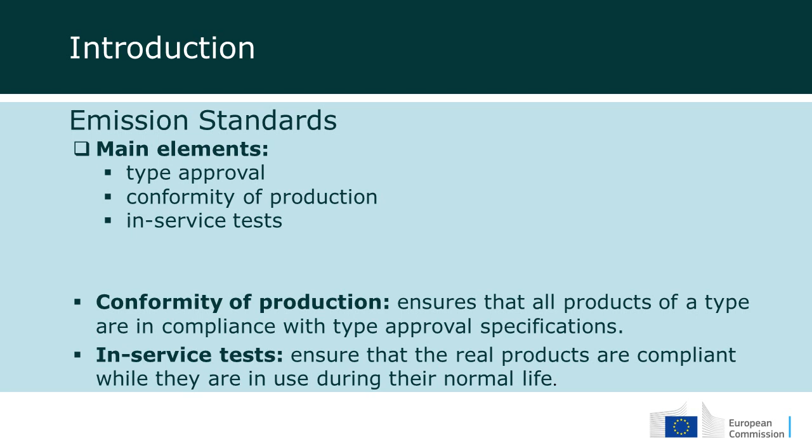So what I'm going to address today in a deeper way is the in-service test.

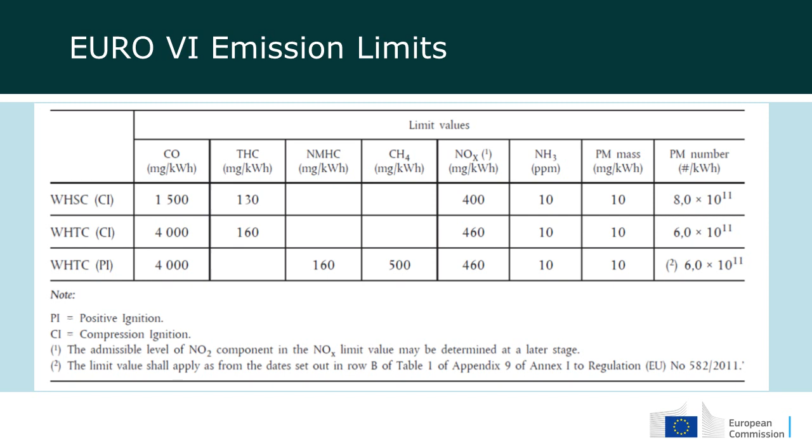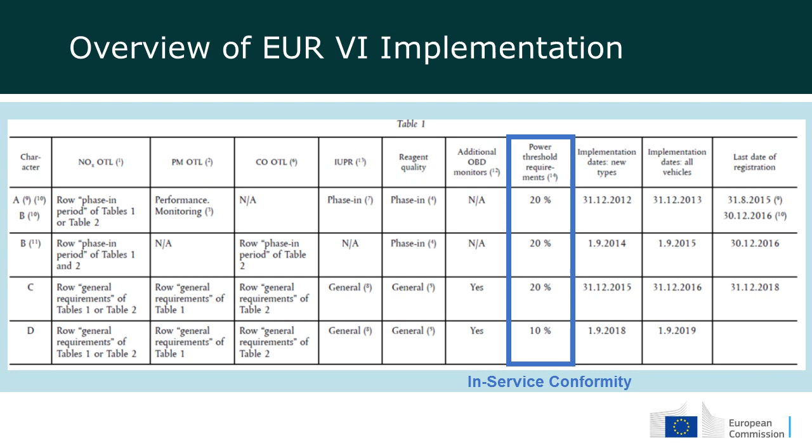Just to remind you of the limit values, which I think you are all aware of. Something that Euro 6 included is the introduction of the particle number, shown on the right of the slide. As I said, it's not a static regulation, it has had several amendments, going from the so-called Euro 6A to Euro 6B, C and D, with the last D already published last September, if I remember correctly. What I have put in blue are the areas that concern in-service conformity, and in particular the so-called power thresholds, which I will address shortly.

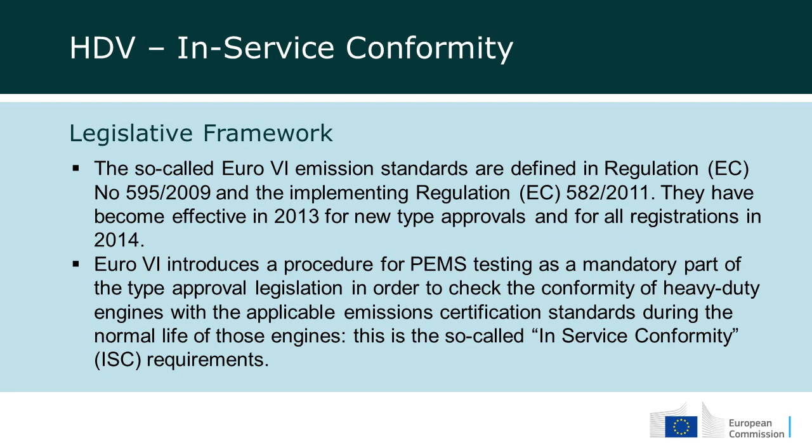So the Euro 6 is based on regulation 595/2009. However, the real bulk of the regulation is in the so-called implementing regulation of 2011. And as I said, maybe the cornerstone is the introduction of portable emission measurement system testing, the PEMS testing, as a mandatory part of the type approval legislation and during the life of the vehicle, the so-called in-service conformity.

One option we had to check that the vehicle during its life is still fulfilling the requirement would have been to take the engine off the vehicle and test it on a test bench. Of course, that brings downtime to the operator and is a very cumbersome thing to do. So we opted for measuring the performance of the vehicle on board, and that's where PEMS comes in, allowing us to check with a certain amount of reliability if the vehicle is still conforming with the expected emission levels.

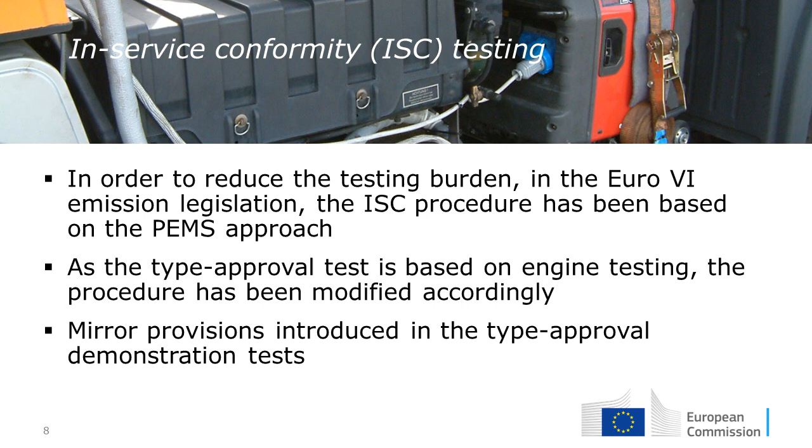We are measuring the vehicle on the road, and we need to know what the emissions of those vehicles are in terms of grams per kilowatt hour. So we have some mirror provisions to be able to do that.

The in-service conformity testing, as I said, has been repeated several times and is, in our opinion, a cornerstone of the success of Euro 6. It's not only performed during the life of the vehicle, it's also performed at type approval, the so-called type approval PEMS test.

The purpose is verification of the performance of the engine and emission control system over the useful life. I've noted the useful life of different vehicle categories in Europe, which may not map one-to-one to vehicle classifications in India. Essentially, M vehicles are buses and coaches, N2 vehicles are heavy-duty trucks under 12 tons, and N3 vehicles are heavy-duty trucks over 12 tons.

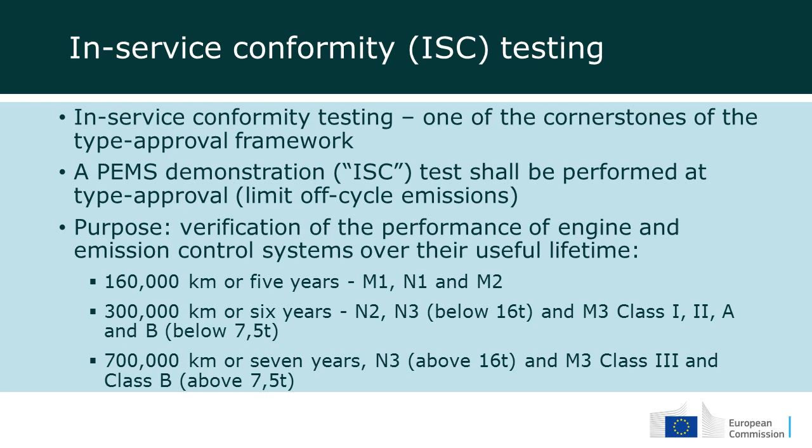So, as I said, the in-service conformity is done on the vehicle operated on real driving routes with normal loads and with the professional driver that vehicle will always have.

The first in-service conformity test, let's call it the type approval test, is done at 18 months from the first registration of the vehicle, with at least 25,000 kilometers. And then every 2 years that test has to be performed.

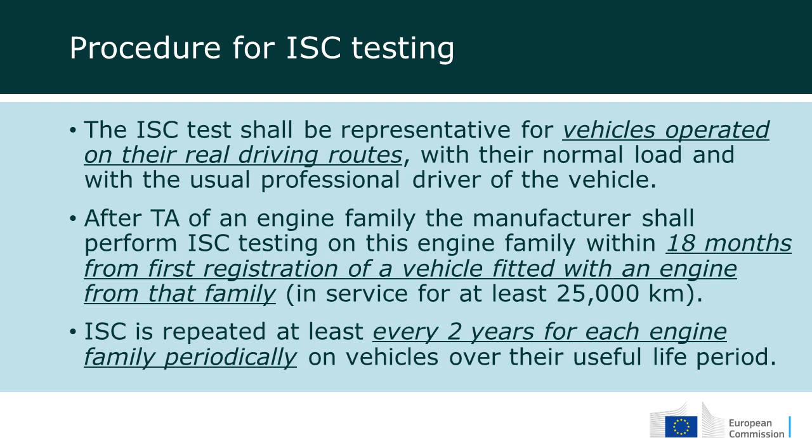Just a note here, not all vehicles are tested this way. What's tested are representative vehicles of the family of engines we're interested in. So it's not that every producer has to test all the vehicles they've produced in the last 2 years—only some representative engines and representative vehicles of that engine family.

As I said, for this type the payload is normally between 50 and 60% of the maximum. There are conditions to be tested, including maximum altitude and temperature, equivalent to the Euro 6 type approval, from -7 up to 35-36 degrees. That may need to be reviewed for India, because the temperature profile there is quite different to Europe. Although we have extreme temperatures, ranging from +40 in South Spain to -20 in northern Sweden.

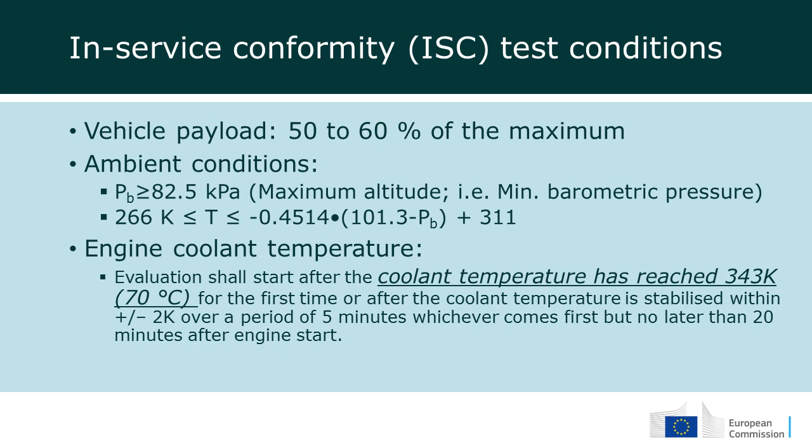At the moment, what we're doing is that the data is only processed as part of the in-service conformity for hot operations. We understand hot operations as those where the coolant temperature of the engine is above 70 degrees C. We'll see this later when I go through the assessment we did of the PEMS procedure and how that impacts really knowing if the vehicle is operating properly or not.

Of course, the trip composition is not just any trip. What I mean is the trip is a normal trip, but it has to have certain compositions. For different types of vehicles we have different percentages of urban, rural, and highway or motorway operation, defined depending on the velocity the vehicle is doing. For urban, it's up to 50 km/h. For rural, it's between 50 and 75. For motorway, it's above 75 km/h.

We'll see that these characteristics have been changed for the last version of Euro 6, the Euro 6D, and why that's being done.

As well, the length of the test is equivalent to or longer than 5 times the work performed during the WHTC, our World Harmonized Test Cycle, or the CO2 emitted during that test. This is done in order to have enough statistics of the vehicle's performance to come up with a reliable assessment.

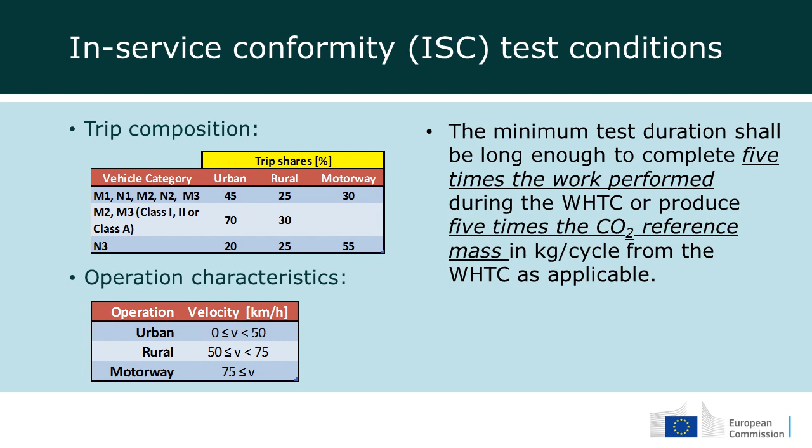Now, going to what we do with the data once testing is performed. Again, not all the data can be used. The data is used only if it's within certain parameters—both ambient conditions, equivalent to those during the type approval test, and the temperature of the engine, in other words the coolant temperature above 70 degrees C. Then what we process is not the full length of the data.

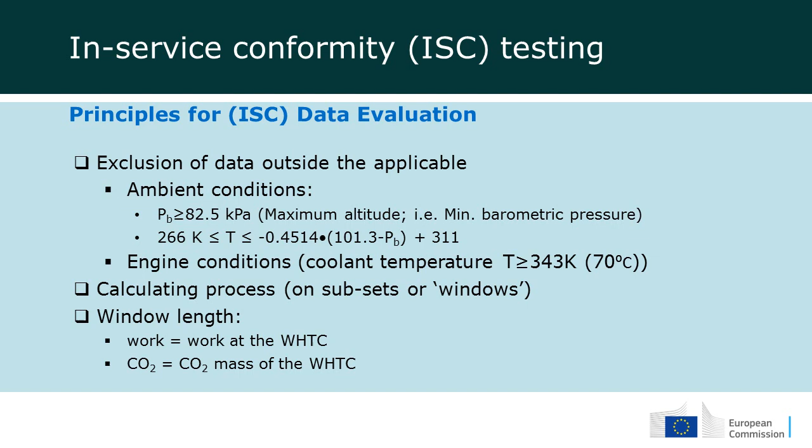We are doing a subset of that data, and I'll comment on that in a few seconds. The length of those windows, which we call the moving average window, is equivalent to the work done or the CO2 emitted during the test at the WHTC.

With those data, on the left you see the approach based on work. On the right, the approach is based on the CO2 emitted.

We can define the so-called conformity factor for each window, which is the integral of the emissions of the pollutant of interest over the limits. That conformity factor is the one we compare with the limits imposed for those windows.

Equivalently, on the CO2 side, it's slightly more difficult because the CO2 will not have the work available directly, so the approach is made per unit of CO2 emitted. But at the end, we have the same equivalent values in one case or the other, as we'll see later.

At the moment, before Euro 6D enters operation, only windows with an average power above 20% of the maximum engine power are considered, and you need 50% of those windows to be valid. Equivalently for CO2, this is transformed into the maximum length of time that window can last, which is just a conversion of power and work into time.

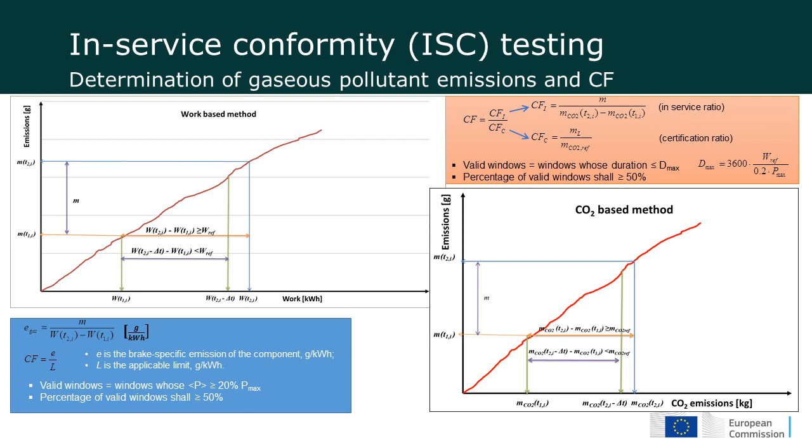So those windows are defined as follows: you start at time 0, and move forward adding the corresponding work until you fulfill one times the work at WHTC. Then you perform the integration of that window and calculate the conformity factor for that window, and so on.

Then you move the window again, at the frequency of data acquisition, which is normally 1 Hertz. So every second we move the start of the window ahead until we fill up the CO2 or work performed, and again perform the emission and conformity factor calculation.

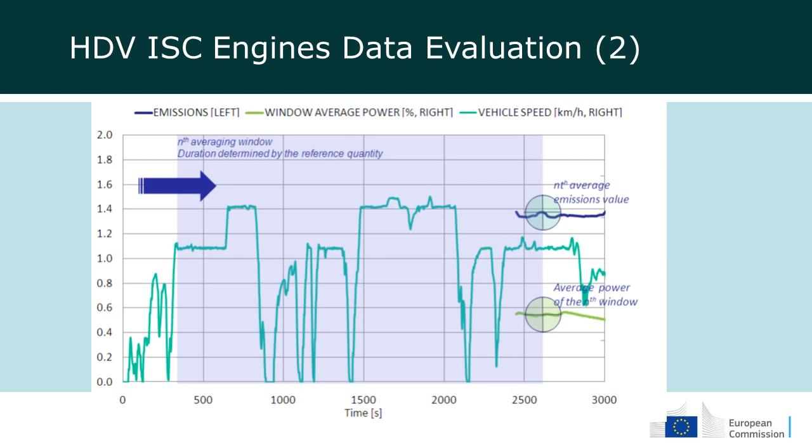At the end, what you do is assign to that test the 90th percentile of all the data you have. So we take out the top 10% of the maximum emitters among those windows, because those can be values that, for whatever reason, went above normal standard operation during the test.

With that approach, we are quite confident that the engine, once extracted and given a type approval test at the test bench, will have passed the test.

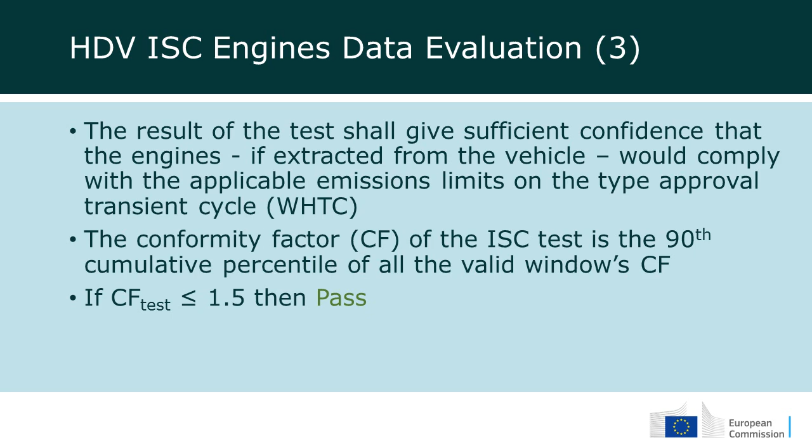The value that 90th percentile has to be less than is 1.5. So the maximum allowable value for those windows is 1.5 times the regulated emission limit.

So how has all this come together to give us confidence that we are fulfilling our roadmap? I'll refer to a few points from the open literature. We find that emission levels compared with Euro 5, the Euro 6 levels are 80 to 90% better in NOx, published in 2015 in an equivalent meeting.

Or that heavy duty has led to a significant improvement in real world emissions or performance of Euro 6, again in 2016, last year, in another meeting.

As I indicated, Euro 5 was not fulfilling our roadmap, but Euro 6 has performed much better than Euro 5 in terms of how much extra emission we can have in real operation. We have between 1 and 1.5 for Euro 6, however for Euro 5 it was 1.9, nearly 4 times, and that's even worse than Euro 4, which was 1.3 to 2.2.

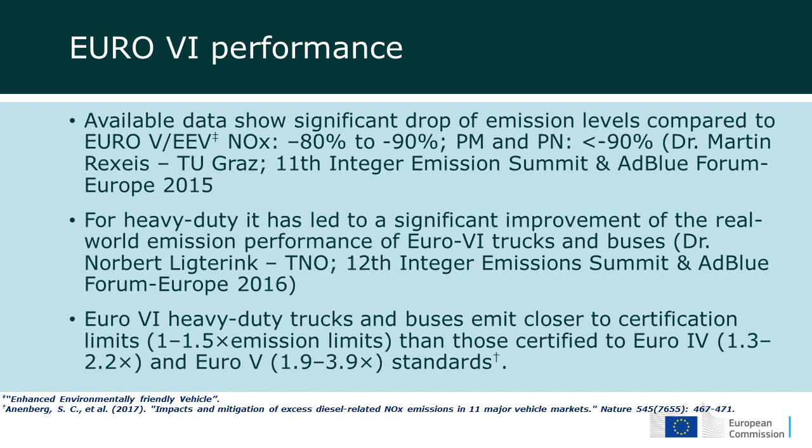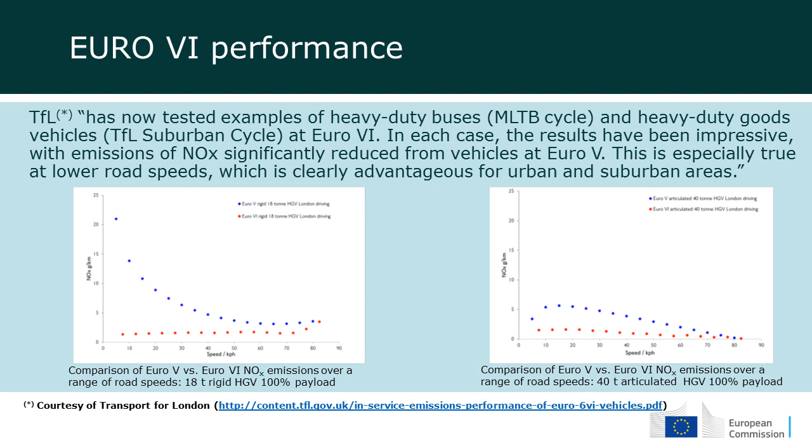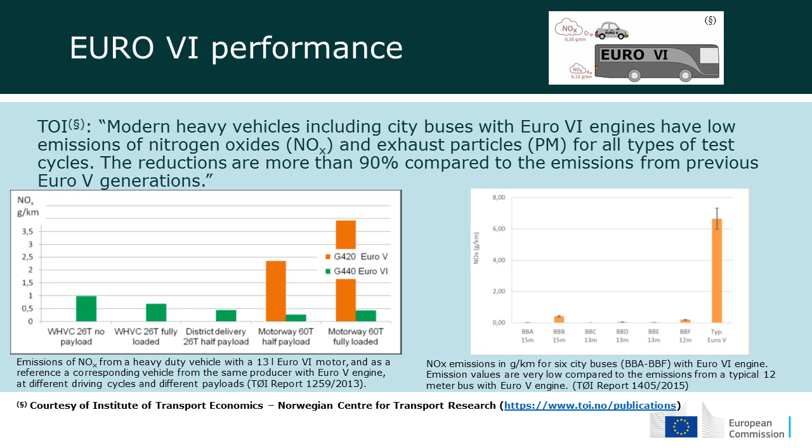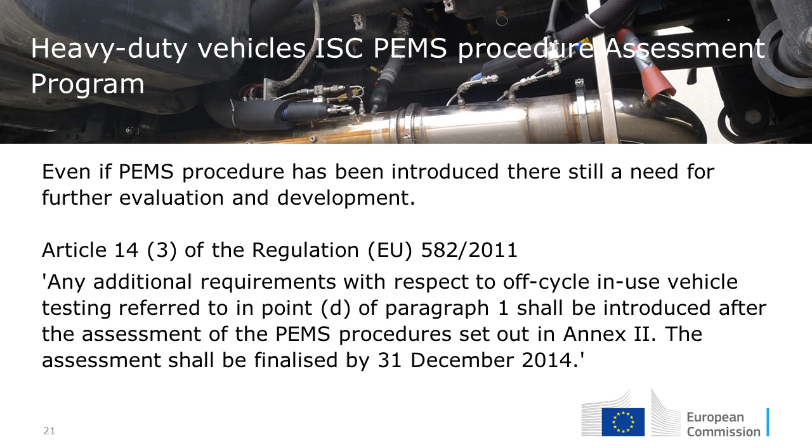We have seen that in-service conformity has done the job well, but the regulator at the time this was put together still had some puzzles to see if it would work, and introduced into the regulation the need to assess the performance of the procedure proposed. That assessment was done by the JRC, trying to address the impacts that cold conditions might have on vehicle performance, the impact of different trip parameters, different payloads, and the influence of trip composition.

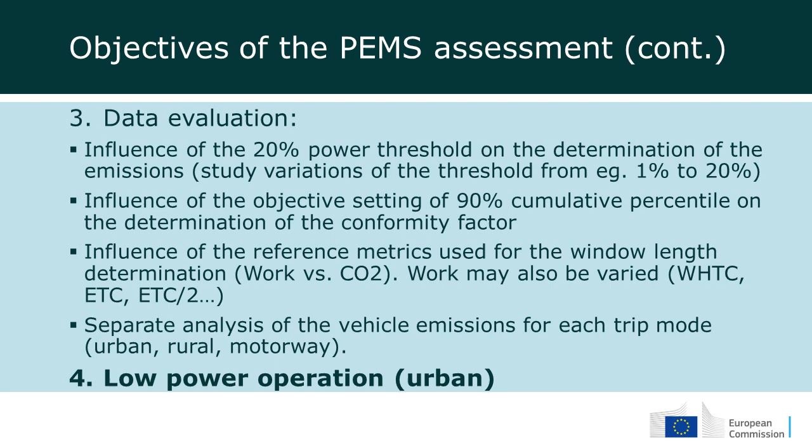As well, is that evaluation the right one to address and assess the performance of the vehicle? One particular point very important to the regulator was low power operation. That's understandable, because low power operation happens in the city, where the impact on the population is larger. So we performed that assessment.

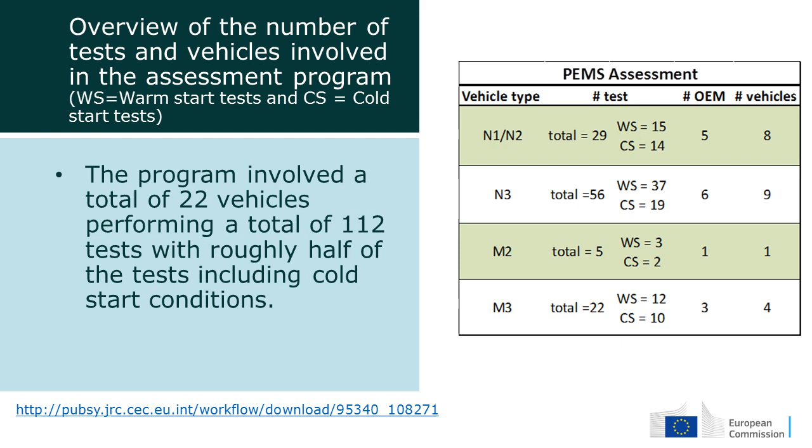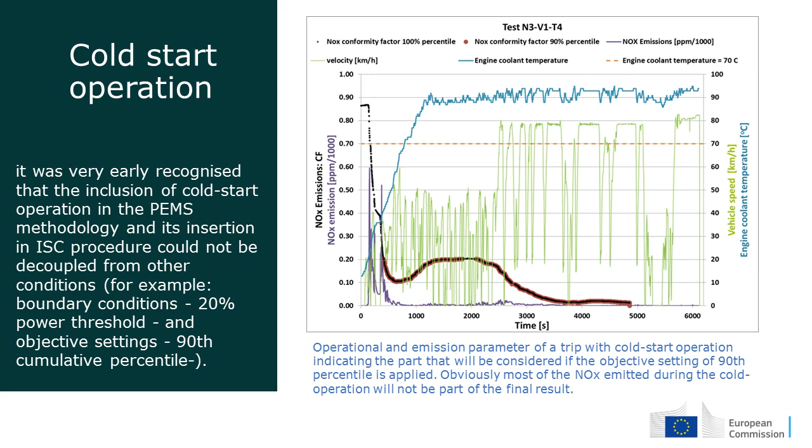Very early in the assessment, we saw that cold conditions—meaning operation of the vehicle with coolant temperature below 70 degrees C—are very important. In this graph, you see that most emissions in a Euro 6 vehicle occur during that part of the trip where we are still in the warming up period.

The other thing we saw very easily is that we have, as I said, a power threshold to define the valid window. That power threshold was set at the onset of Euro 6 at 20% of maximum power, but we saw very early that this eliminates most of the low power operation of vehicles, meaning most of the impact those vehicles have in urban conditions.

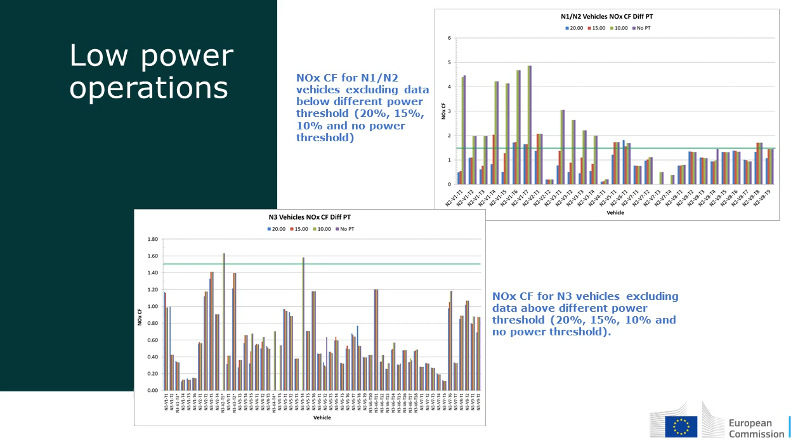Here you see it better. This is an N2 truck performing its trip, and by introducing the 20% threshold, most of the urban operation is not considered when assessing the performance of the vehicle.

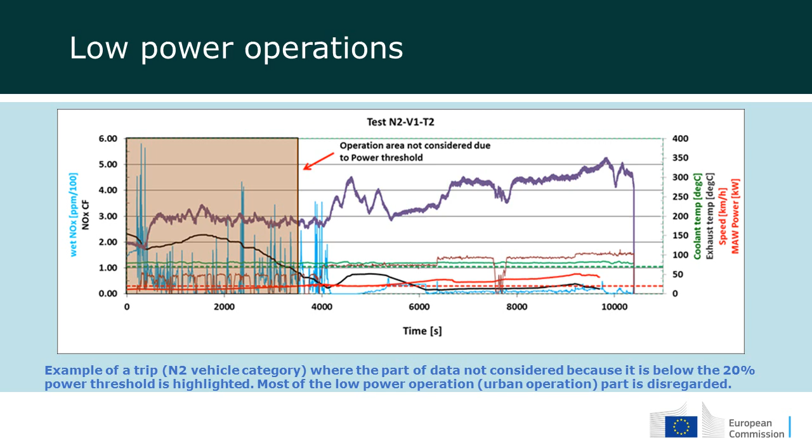As well, the distribution of urban, rural, and highway driving was in some ways very different from what's expected on the WHVC, with a tendency to operate vehicles always at the top end of the velocity bracket. So if urban was defined as 0 to 50 km/h, most vehicles, although supposed to be in urban operation, were operating near 50 km/h, for one simple reason: they wanted the SCR temperature to be at the right level so it's operating properly.

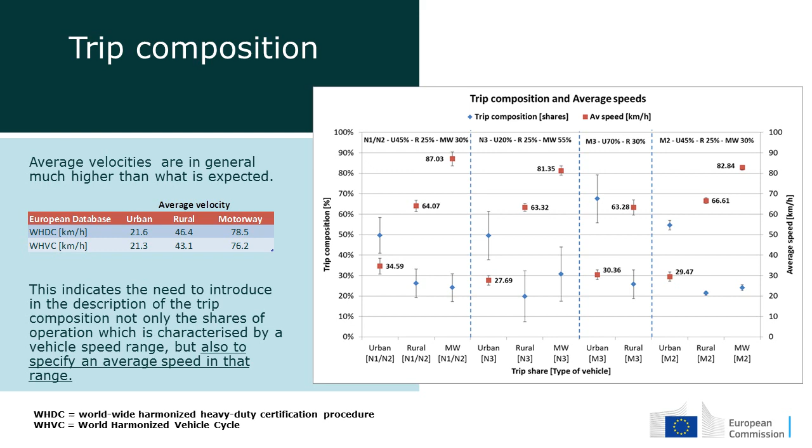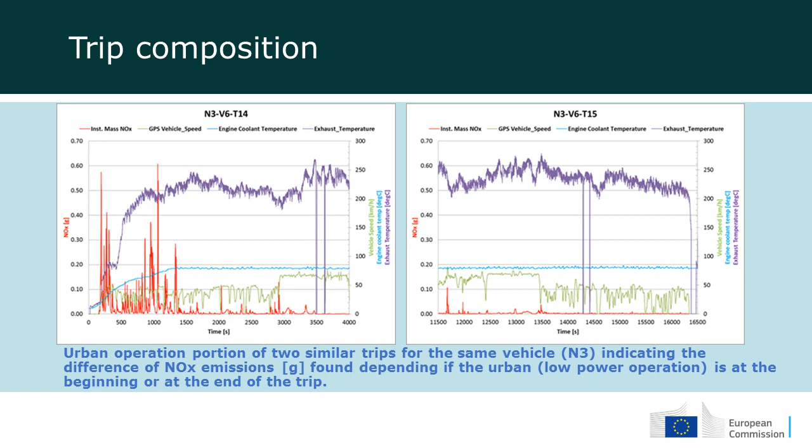As you notice, the emissions, shown in red on the graphic, are much different in the urban operation. In the first case, the vehicle is at low power and not yet operating at the optimum point of the SCR, so NOx reduction by the SCR is not so efficient. In the second case, the vehicle is already warmed up during the highway and rural operation, so the SCR is operating in the optimum temperature range with high efficiency, and nearly no NOx is seen.

Another point raised with us is that we have two approaches: one is the work-based window, the other is the CO2-based window. So we did comparisons for the same trip, the same vehicle, to see what results we get with one approach versus the other.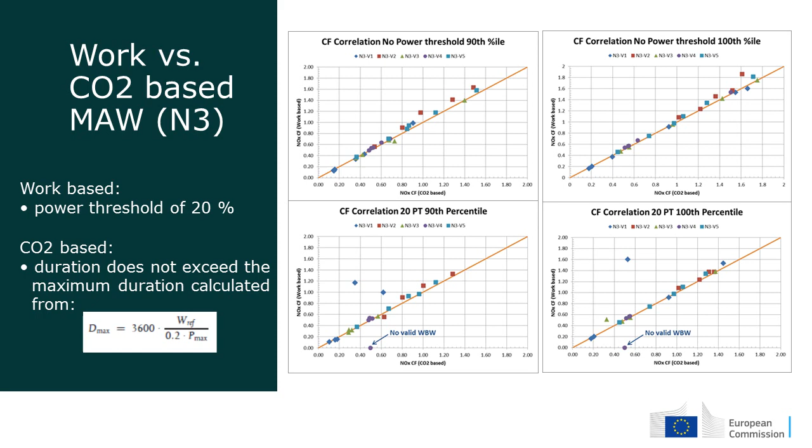When we put together all these conditions—cold start included or not, the 20% power threshold, the 90th percentile—by introducing all these boundaries, we are taking away more and more of the data that we can use to assess the vehicle. In some occasions, it gets up to 60-70% of the data not used for the assessment, and that is something we wouldn't like to see.

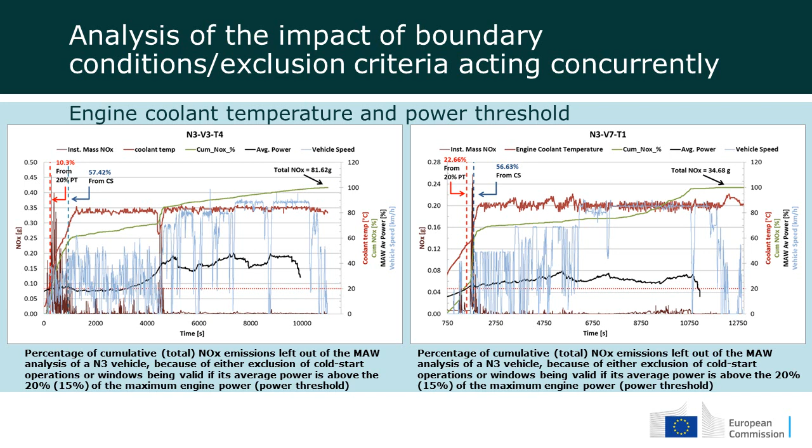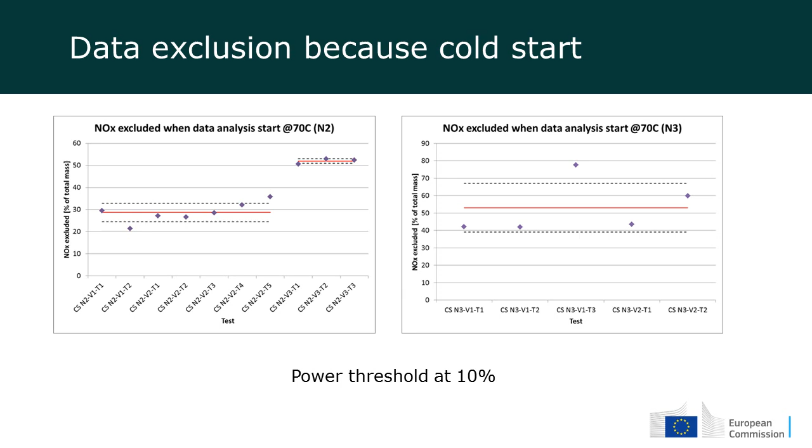Here you see how much data for different vehicles, if you include or not the cold start, for different types of vehicle, is left behind by introducing the 70 degrees C threshold. It can be 30%, 50%, or even higher than 50% for some types. By introducing the power threshold at 10%, that is very much reduced—we only leave off something like 20% of the data not used for the assessment.

So all these things together led to the conclusion that the PEMS approach is a valid approach. However, it needs to be tuned up in order to make sure that the assessment of the vehicle on the road is valid.

At that moment, we left the payload the same. We keep again the same units for the windows. We test as well other units, rather than one WHTC work or CO2, maybe half or twice.

For the duration, we advise that it be no more than 5, as in the previous case, but between 4 and 6. I said between 4 and 6 because that gives flexibility to the operator—during the test they don't know how much work is being done. It's not known until afterwards. So just to give some flexibility.

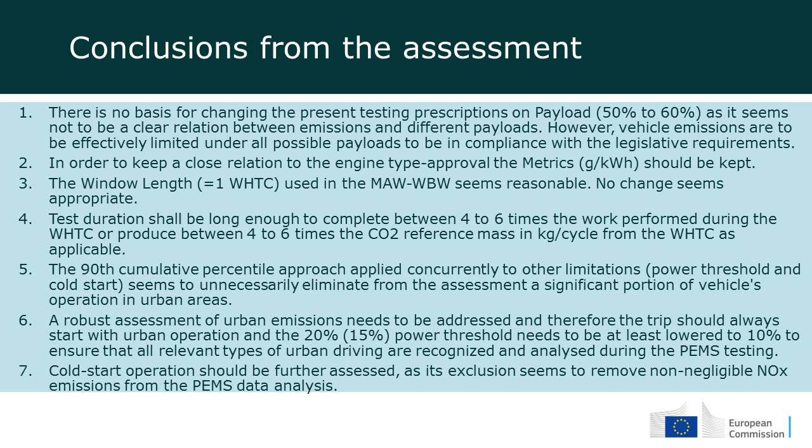Something we of course analyzed was the impact of the cold start operation and how we can introduce that into the procedure.

So just as a summary: the advice we gave to our colleagues in the regulatory part of the Commission was taken over in discussion and consensually with the OEMs and vehicle manufacturers, and the new Euro 6D introduced a clear indication of the order in which tests need to be performed—I'm referring here to the fact that it has to start always with urban. It introduced as well that the power threshold has to be at 10%, and introduced as well that we need to look at how to treat cold start as an important part of the emission fingerprint of the vehicle.

We were also indicating that at the moment the in-service conformity is only done on gaseous pollutants. We need to introduce the particulate as well, and indeed we are working very hard to introduce particulate into the whole process, and we are very close to that.

The cold start is a more complicated one, because we need to perform tests at cold operation conditions, and we need as well to arrive at an approach that is not too heavy in giving importance to that 5 minutes or so of cold start that any vehicle will have, relative to the full vision of how the vehicle performs.